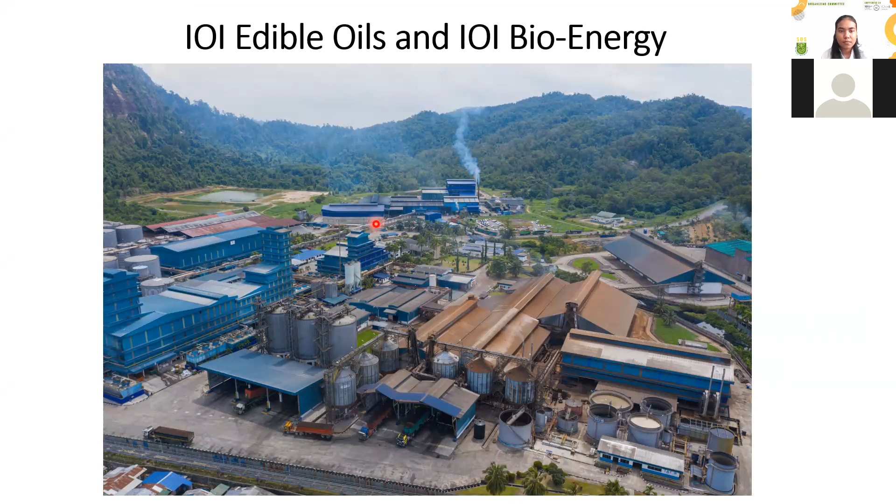Okay, this is an aerial view of the complex. This is the biomass plant, like I pointed out. This is the kernel crushing plant. And you'll again see here, this is the main office, and everywhere we can, we try and keep the greeneries.

If you zoom in, you'll find that along this pipeline as well, you'll see all the greeneries that are planted around it. So we try and maintain all the greens that we can in the complex.

We're also one of the largest tank farm operators in Sabah, with about 64 tanks. We also have a jetty connected to it. The pump house here, these two pump houses pump products straight onto vessels.

So this is what we call the lauric tank farm, because we process palm kernel oil. And the bulk of it is actually palmitic storage tanks, which store the derivatives from crude palm oil processed in our plant. This row here is the refinery complex: refinery 1, refinery 2, and refinery 3.

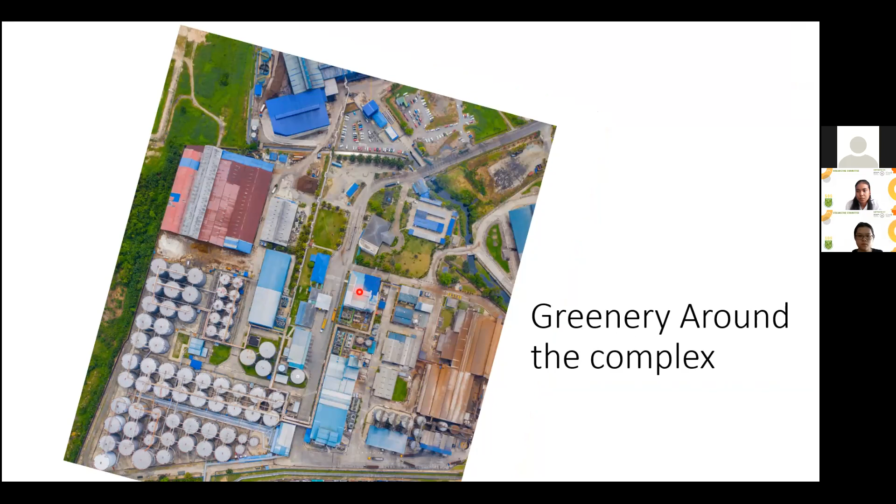And like I said earlier, nestled with it are also the dry fractionation plants.

Okay, I will talk about... let me hide this. Right there. Okay.

Some of the things we've done here - we've got, like I showed you just now, a long pipeline that supplies steam over to the complex, and there are many areas where steam is utilized. We also install a lot of steam traps and collect the condensate, which is used for lower grade heating applications.

We also have an award-winning vent economizer project that we did. We've also done quite a few inverter and LED light projects, converting most of the spotlights in the complex to LED lights, and also using inverters for selected applications.

We are the prime mover for converting the whole of Sabah to use liquefied natural gas versus diesel. The refineries here have now converted to using liquefied natural gas, which is actually more environment friendly than diesel.

I'll also show you a major heat recovery project that we did in the refinery. Our kernel crushing plants - we've also installed dust plants here to trap the fugitive dust and vapors that come out from kernel crushing. I'll show you some pictures of the results after we've done it.

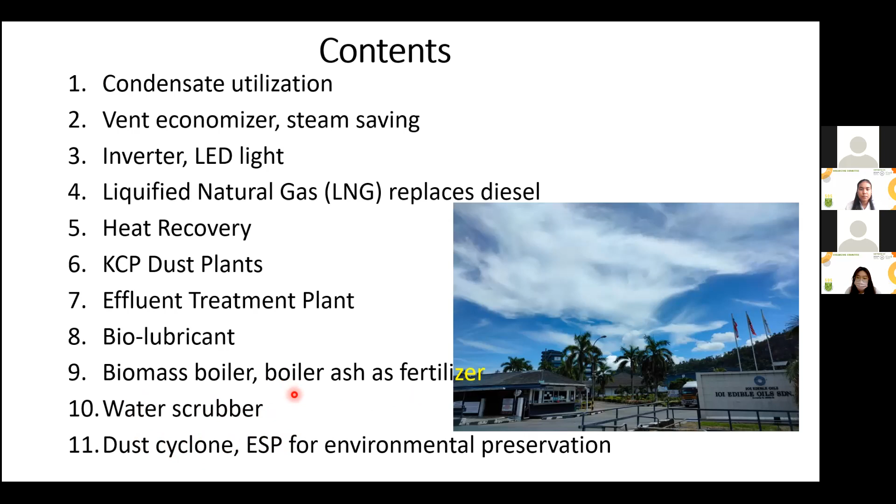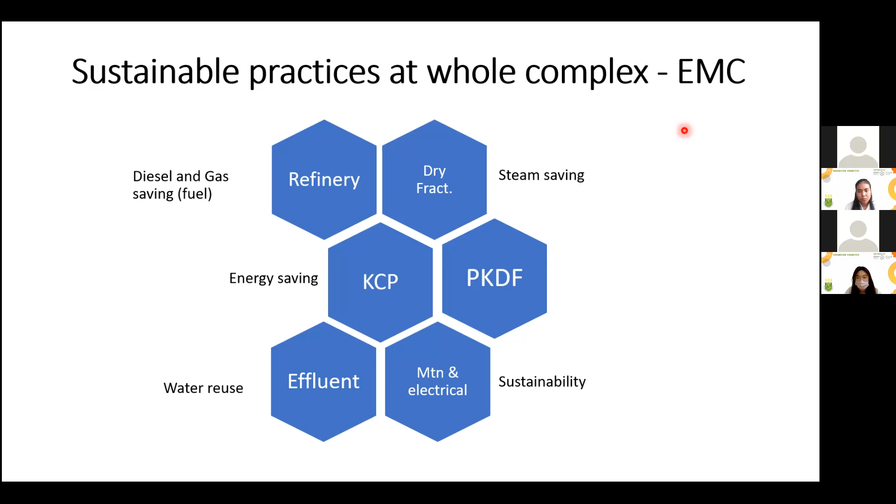Some of the practices, like I said, we have got refinery, dry fractionation, kernel crushing plant, palm kernel dry fractionation, effluent, and we also have maintenance electrical people here. So some of the things that we've done here to save energy and reduce greenhouse gas emissions from the whole complex: we have an energy management committee, which meets every 2 months. We've also got a registered energy manager who has to submit reports to Suruhanjaya Tenaga, the Energy Commission, every 6 months, reporting on what savings have been done and what has not. This has also helped us reduce our carbon footprint.

Like I said, we have a lot of supply of steam into our plant, and we have installed condensate recovery tanks in strategic locations. So the condensate from the steam traps is channeled to these tanks, and then used for lower grade applications to heat up, like for instance the palm kernel stearin tanks or even the stearin tanks. It has helped us reduce our steam consumption quite significantly.

In the palm kernel dry fractionation plant, it used to be 110 kg of steam consumed per ton of product, and they managed to reduce it to about 65 kg per ton, which is a 40% reduction in steam consumption. Another thing is, because we're not so dependent on steam and are using condensate, we're able to run the plant even if there's a slight steam interruption, since the condensate will keep the plant running for a longer period of time. This is one of the things that we have done.

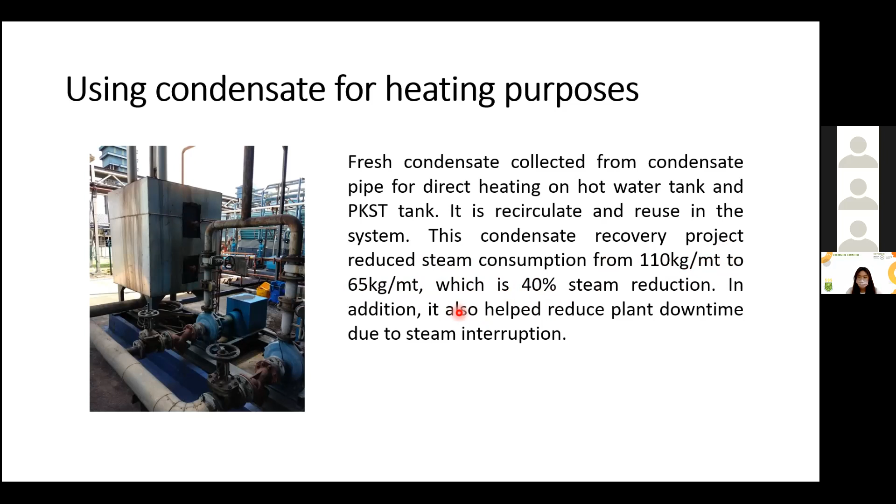Continuing on this, areas where we've recovered condensate and used it are also for CPO washing. We're one of the first plants in Sabah, and probably in Malaysia, to have installed CPO washing to reduce contaminants in processed palm oil. It requires the use of hot water, so rather than use steam to heat up the water, we actually recover the condensate and use it for the CPO washing process.

Other areas we use it for are stearin cake heating. The palm kernel stearin cake is typically discharged at about 25 degrees - it's a solid, a very hard solid. So it is then heated using heating coils inside the tank, and with our new system, we use condensate. Of course, whenever we start up the plant and there's no condensate available, we may use steam to heat up the water initially. This is for the palm kernel dry fractionation plant.

A similar thing was done for the dry fractionation plant as well, where originally they were heated using steam coils and steam fins - we've converted to using condensate. In some cases, we've had to also add a heat exchanger in order to ensure proper heat exchange and heat recovery to ensure sufficient melting of the stearin.

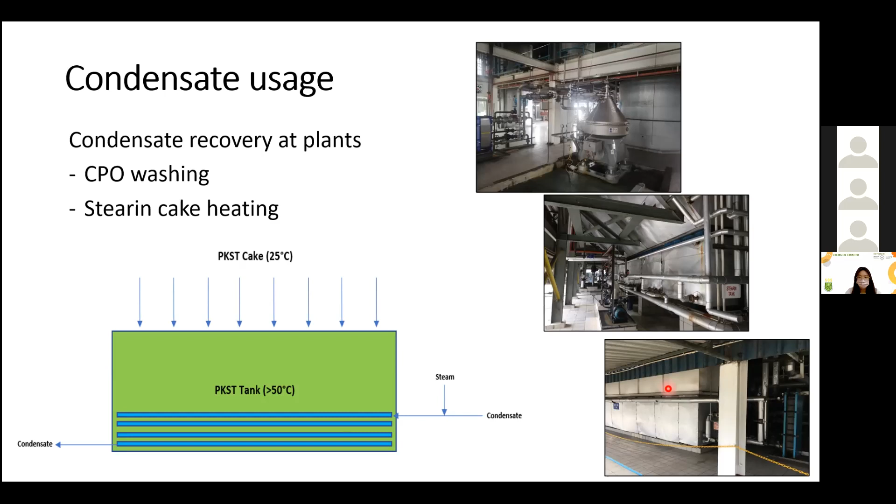Now, an added bonus from doing this is that the quality of our products has improved, because when you use steam, the temperature is actually higher than 100 degrees. And as you know, the higher the temperature, the greater the rate of reaction and the greater the rate of decomposition, so there's more deterioration in product quality. By using a lower temperature with condensate, coming in anywhere between 70 to 90 degrees, it has helped preserve the quality of these products better.

Now, like I mentioned, you've got these condensate tanks. As we were walking around the plant, one of our smart engineers saw vapor coming out from the condensate tank and said, why don't we try and recover this heat that's available in the vapor? So that's what we did. This vent economizer is this unit over here.

It's basically a compact heat exchanger into which water is fed. That water is heated up and goes to be used in low temperature heating applications. All this vapor is then condensed and dropped back into the condensate tank, used for heating purposes as well. This was implemented in the dry fractionation plant, and you can see the steam consumption started dropping from 25.5 kg per ton of palm oil.

It started dropping over the years as we implemented more vent economizers around the complex, and it dropped to about 20.5 kilograms per ton of product. The latest result is also around 20.4 kg per ton of product.

One of our engineers who sits on the energy management committee, but works in the palm kernel fractionation plant, saw this being done in the dry fractionation plant and decided to copy it. It was initially consuming over 110 kg per ton of product in the palm kernel fractionation plant. By implementing this, we were able to bring it down to about 67 kg per ton.

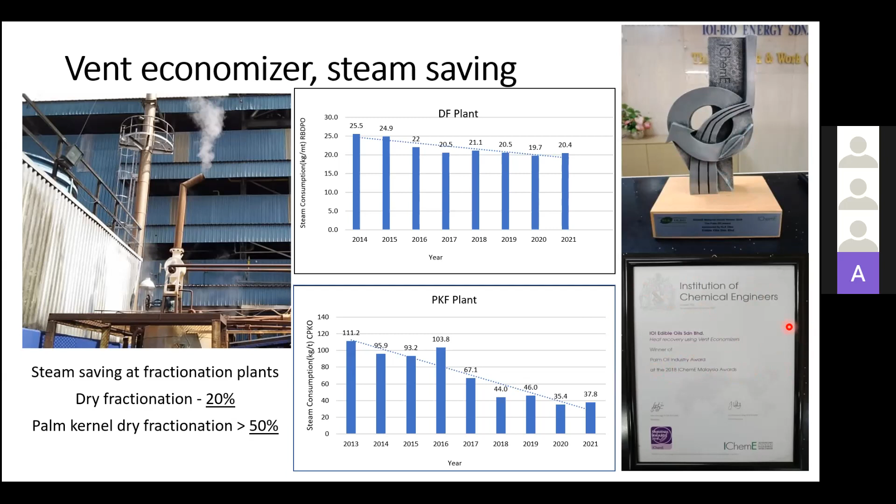Another thing we've done all over the plant is install inverters wherever required, in order to optimize operation, where previously pumps were being throttled.

It's quite sizable. Another thing we've done is install inverters for variable speed drives on our air compressors. If you look at a lot of air compressors, you'll see they actually run and stop when they achieve a certain pressure.

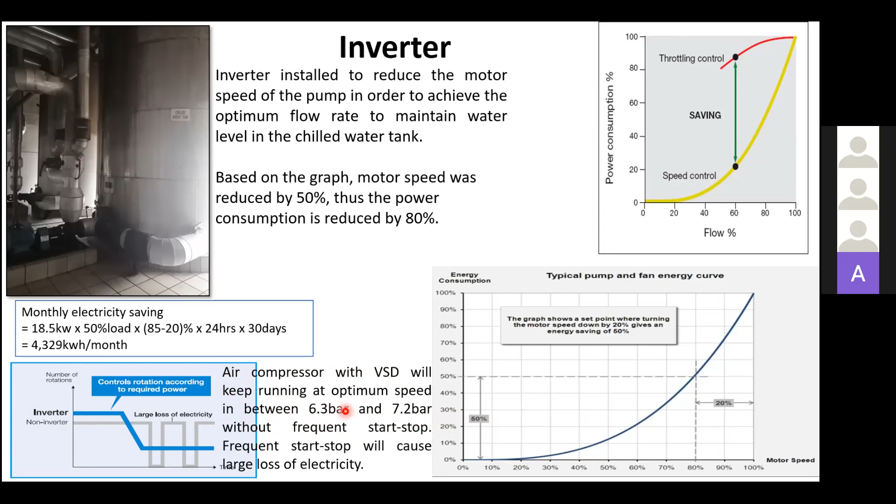So we grouped up all the savings we've achieved in the plant, looking at heat exchangers, inverters, and LED lighting. Starting from 2017, you'll see the amount we've saved in terms of energy has kept increasing. Now we are saving about 2.3 million kilowatt hours, and in terms of cost saved, it's about $163,000, roughly 500,000 ringgit in savings.

The inverters are installed on these pumps, the cooling tower pumps, with a cooling tower in the background. The inverters are installed on selected pumps. This is what the inverter looks like in the startup panel, or control panel, for the pump. And these are the cooling tower fans above the cooling tower.

Again, we install inverters so that when the temperature of the water is very low, we can reduce the speed or even stop a particular fan.

This is the LED lighting we've started using in the tank farm. Previously we were using spotlights, but we've converted to LED lights, which have a lower carbon footprint, consume less energy, and waste less energy.

So these are some of the areas where we've managed to implement our plan, reducing our carbon footprint by reducing energy consumption, as well as resulting in financial savings for the company.

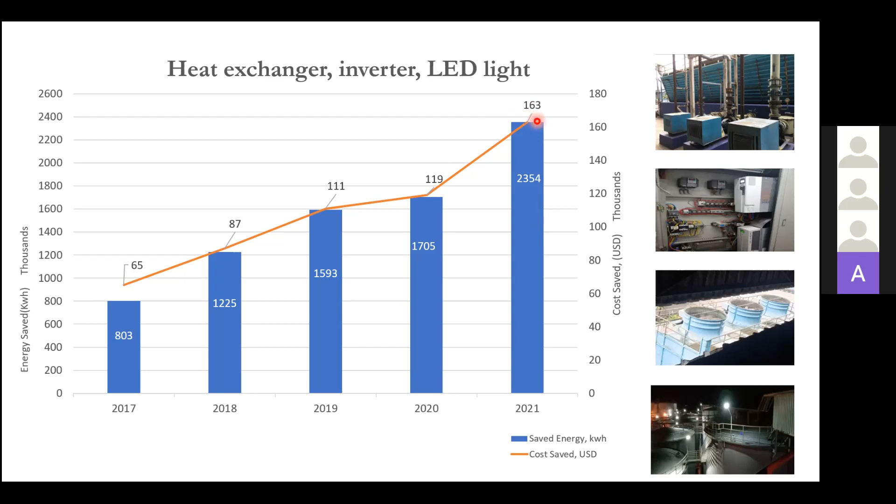Like I said earlier, we started talks with Sabah Energy Company in order to put up tanks in our various refineries to receive liquefied natural gas.

I'm proud to say that over the last few years, most of the refineries in Sabah have converted to using LNG, until SEC is already sold out on its gas. Now they've got to look at putting up a second train.

The reason we've done it is because LNG has got a lower emission factor compared to diesel, which is rated at 0.088 kg carbon dioxide equivalent per megajoule compared to 0.07 kg carbon dioxide equivalent per megajoule.

We have also tried to reuse foundations and avoided a lot of civil work, so no piling was done for this particular project.

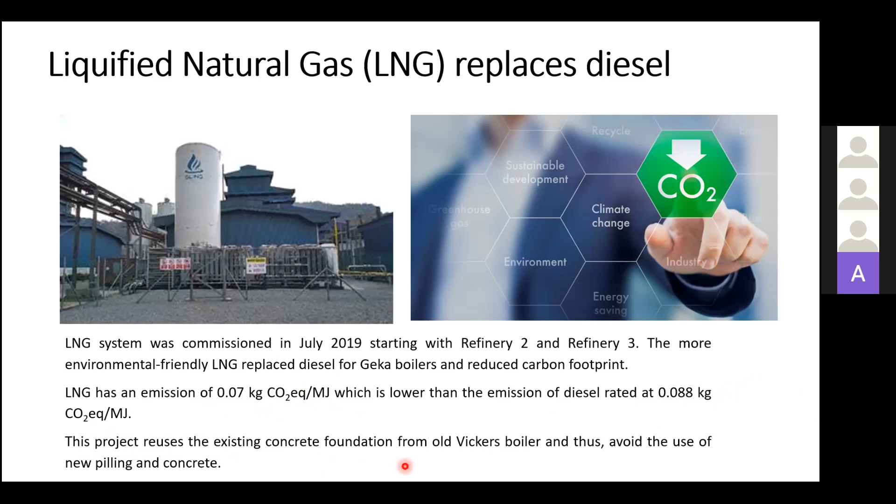Okay, this is an interesting heat recovery project that we did for one of the refineries. Let me show you the next diagram. Okay, this is the initial configuration of the plant.

BPO is bleached palm oil. It flows into a falling film heat exchanger, which then goes into a final heater, again a heat exchanger, which then goes to the pre-stripper, to the deodorizer. The very hot oil comes back and heat is recovered in this falling film heat exchanger, and then it goes for final cooling, and you have your RBD palm oil, refined bleached deodorized palm oil.

Over the years, this unit started to get fouled, and when we shut down, we didn't have enough time to do caustic cleaning, so we were losing out on the heat exchange and our consumptions were increasing. We do clean it, but it was not able to clean it sufficiently.

So the manager in charge of the plant suggested putting in spiral heat exchangers, so we invested in spiral heat exchangers. The bleached palm oil then goes to the spiral heat exchanger, then follows the same route to the final heater, pre-stripper, deodorizer, back to the spiral heat exchanger, and you get your product RBD palm oil as well.

Now, when we did this, we did not remove the falling film heat exchanger. We left it there, but we blanked it off. We isolated it from the spiral heat exchanger so we could run the spiral heat exchanger and avoid going through the falling film heat exchanger.

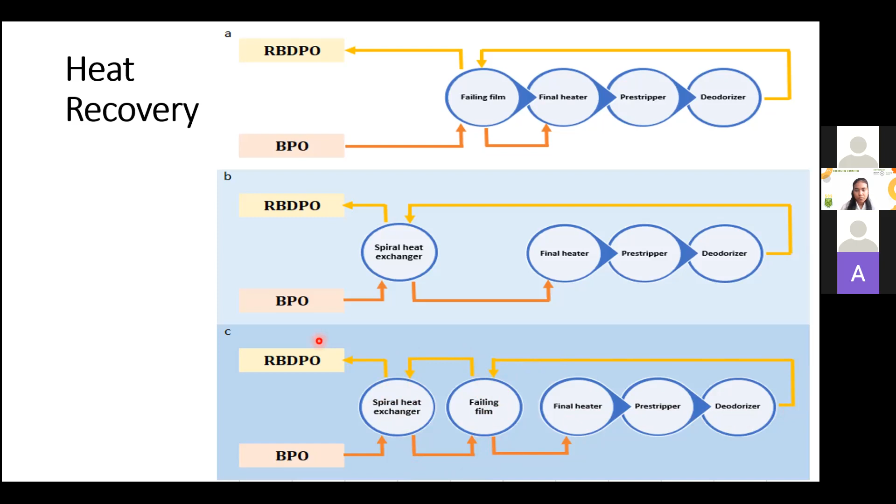That means the bleached palm oil goes to the spiral heat exchanger, then comes up, goes to the falling film heat exchanger, then next to the final heater, and then follows to the pre-stripper, deodorizer, and back to the falling film to recover as much heat as possible before it goes to the spiral heat exchanger and into our product storage tanks after being cooled. If I go back to the previous slide, you will see in 2014 the diesel and gas consumption was 5.73 liters per metric ton of palm oil.

In 2015, when we did the cleaning, we were able to reduce it by about 10%. This was with the falling film only. Then in 2016, after we installed the spiral heat exchanger, there was a 31% reduction in fuel consumption. You'll see it dropped from 5.73 to 3.93. We've used 5.73 as our base year figure, baseline.

Then it started going up. We did cleaning again of the spiral heat exchanger, and we were able to maintain about 36% over the few years. It stabilized around here. Then the engineer put back the falling film in series with the spiral heat exchangers, and you'll see that it has dropped significantly to 50%. So where we were initially consuming 5.73 liters, we now dropped to 2.89 liters.

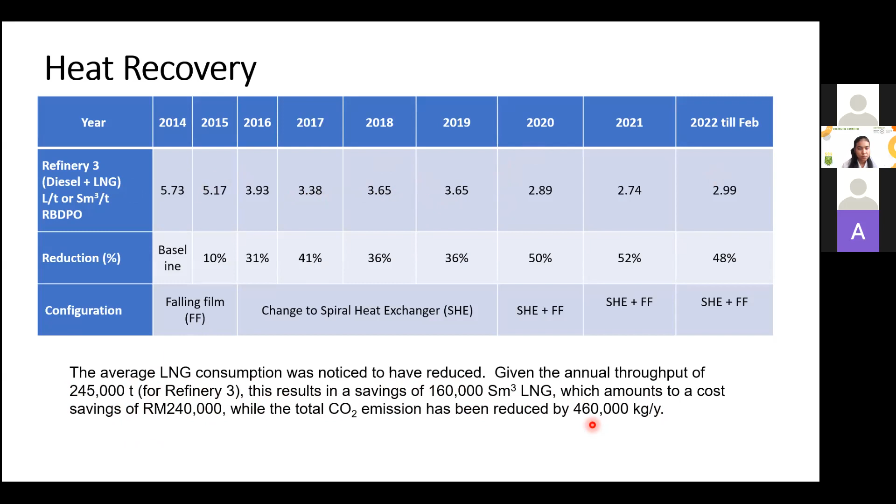So you can see during this period, we also switched from diesel to liquefied natural gas, and that's why the figures are shown here as an adjusted combined figure of using diesel and LNG. You'll notice that the LNG consumption has reduced, and the annual throughput of the refinery will give us savings of about 160,000 standard cubic meters of liquefied natural gas, which amounts to cost savings of 240,000 and a reduction in CO2 emission of about 460,000 kgs, or 460 tons a year - quite a substantial reduction just by doing this heat exchange reconfiguration.

Okay, let me leave you with another video now, which is by the World Wildlife Fund, and there is no voiceover on this. There are words, so you'll have to read it. So pay attention to the video - it's about global warming and the effects.

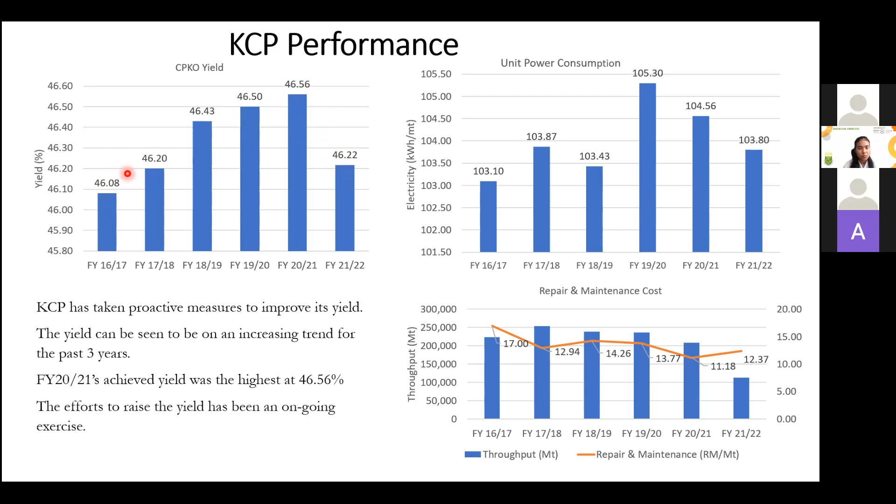Let me show you some of what we have done. In our kernel crushing plant, we have steadily increased the yields. This is the yield of the kernel crushing plant, and you'll see it has dropped this year. I know it's not the full year yet, but it's unlikely to recover to this level. It's mainly due to the poor crop coming in this year, affected by COVID and lack of manpower in the mills and estates. But what's interesting is we've actually kept it above 46% - this is a challenge for many kernel crushing plants, yet we kept it above 46% over these years.

At the same time, if you look at it over here, the power consumption actually reduced. These are supposed to work the other way - if the yield is improved, that involves greater pressing, which should result in higher power consumption. If you ask me why my power consumption jumped here, it's because we installed dust mitigation plants in the kernel crushing plant, so there was an increase in equipment installed there to trap the vapors and dust. But despite installing that, over subsequent years we've actually pushed to reduce our electricity consumption, or unit consumption.

Another impressive thing here is that, again, with increasing yields meaning more pressing being done, you'd expect more wear and tear. But we've actually been quite innovative in keeping our maintenance costs down - this maintenance is due to wear and tear of the presses. So the team here works very hard and tries to implement innovative ideas to keep the plant running at high yields, lower unit power consumption, as well as maintaining low maintenance costs.

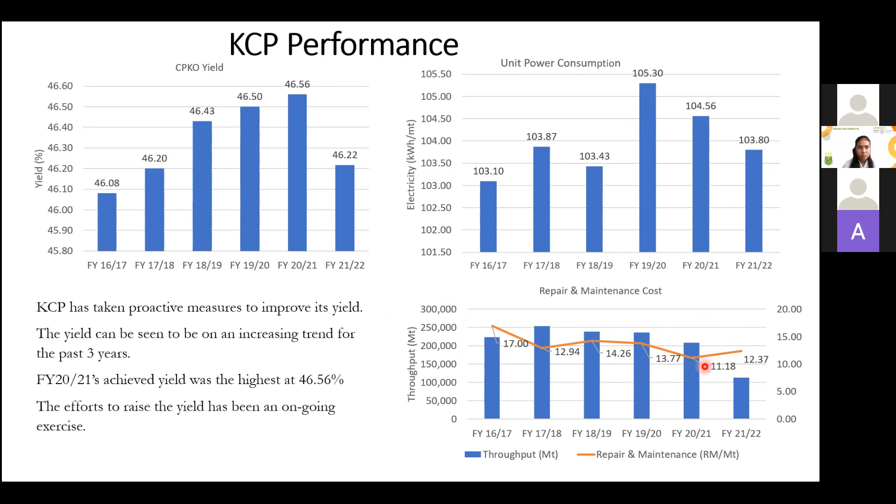From the palm oil industry per se, in this refinery complex, there's no real waste being generated. It's quite circular - everything can be used and sold.

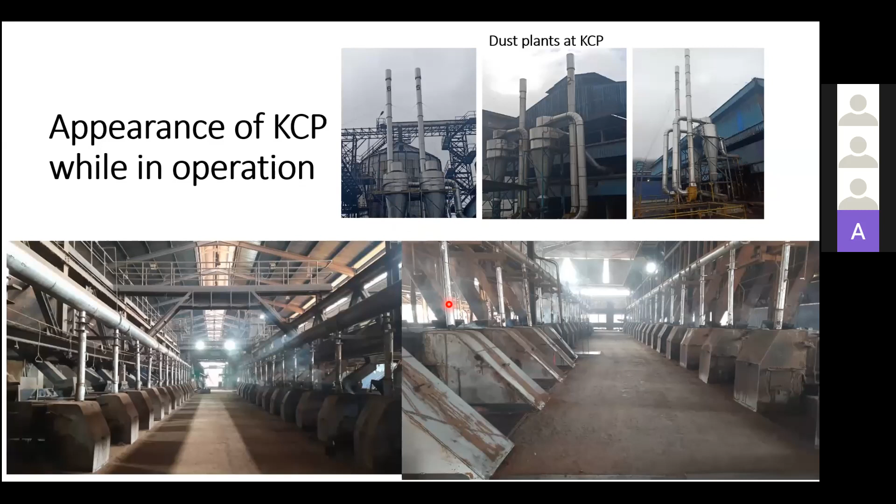Now, I mentioned that there is no waste from the palm oil industry. This bleaching earth is used to remove the impurities in palm oil during the bleaching operation. When it is discharged from the process, there is about 20% oil stuck to the bleaching earth.

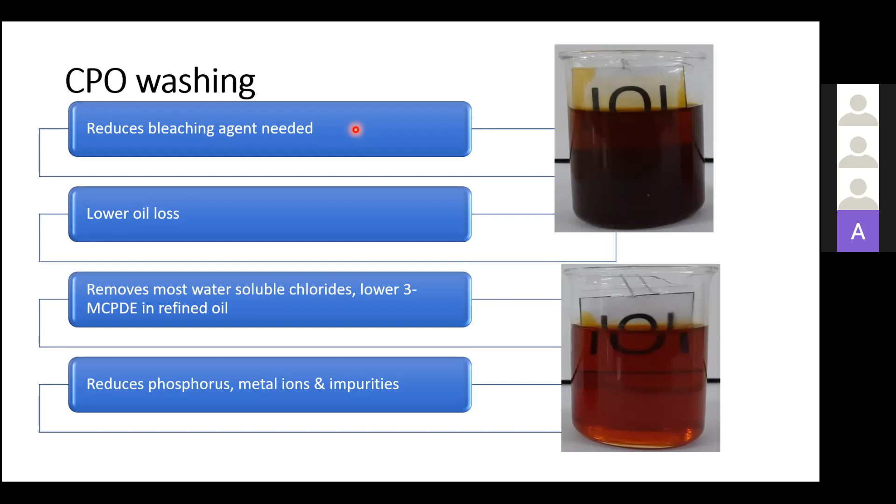Now, when we did the CPO washing as well, the water stream had very high oil content, and this increased the load or burden on the effluent treatment plant. In order to reduce that, we had a purpose-designed settling tank fabricated, and we're able to reduce the oil content significantly to below 1,000 ppm, so that it could be easily processed by the effluent treatment plant.

If it were very high COD, it creates a very great strain for the reactors or the bacteria in our effluent plant. Yes, we use bacteria for the sequential batch reactors in our effluent treatment plant.

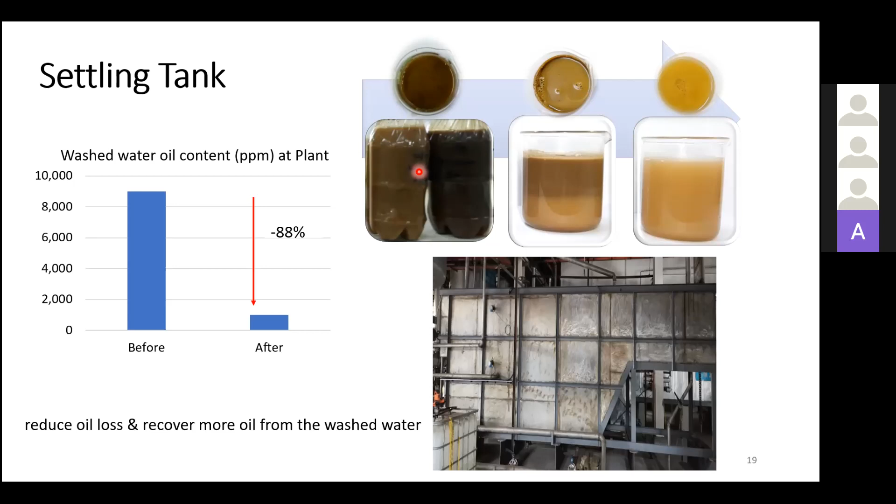I'll explain that later. We do a lot of water recycling in our plant. We have our own treated water, and for some applications, it goes through reverse osmosis after the basic water treatment. If you're familiar with the reverse osmosis process, maybe about 15 to 20% of the water treated becomes rejected water. We try to use that rejected water so we minimize water being wasted.

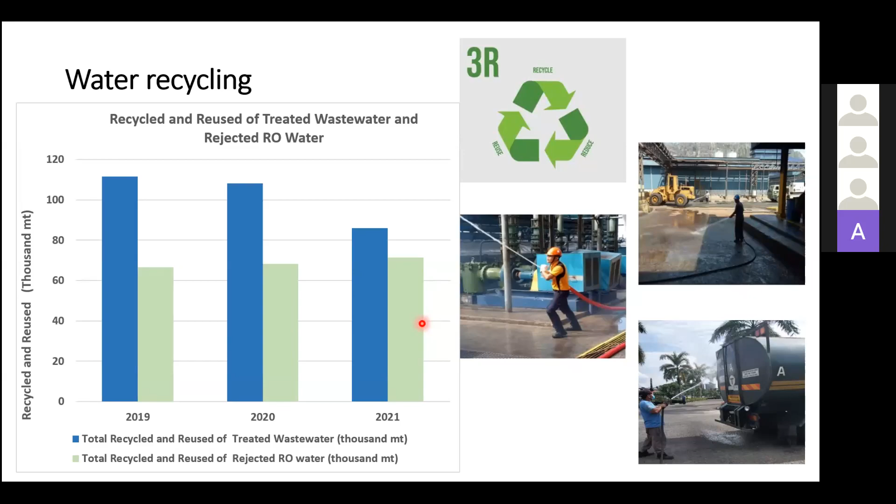We did some optimization, and we were able to reduce this aeration time significantly, and as a result, reduce the electricity consumption in the effluent treatment plant. We've also managed to shorten the process, bypassing some of these steps, and reduce chemical usage in the process as well, again reducing our carbon footprint.

Previously, the sludge that was generated was actually disposed of, but now, since all of the waste coming from the refinery is actually organic, we send that sludge back for digestion in the reactors, and it is possible for the bacteria to totally digest and reduce the COD of our water.

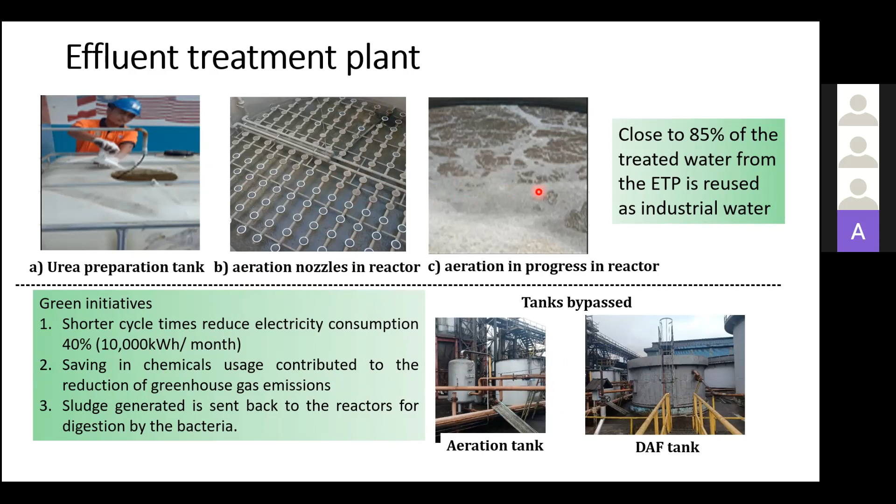But the problem is the stability and deterioration of olein or palm oil derivative due to oxidation and high temperature application.

So we're actually doing some experiments to try and enhance the life, and I'm proud to say we've been running this for more than 6 months now, and it's showing positive results. We've also managed to work with a third party who has suitable additives and ingredients, all made from palm oil, to be added into the olein in order to be used as a lubricant.

One of the problems faced by edible oils is that there are trace amounts of mineral oils found in processed oils, which has become an issue of complaint by the West. So this would be a good initiative to convert the industry to use our own product, create demand for it, and ensure that no lubricant contaminates our edible oils. I'm sure you wouldn't want your family members or even small babies consuming mineral oils, so this is a good way to use our own product to address that challenge.

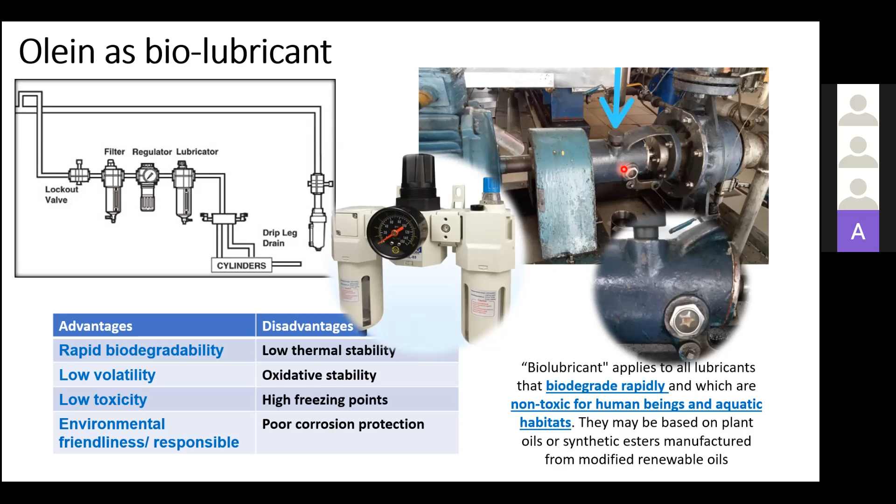We're putting some improvements here to try and improve this further. We've done a new boiler with an improved grate system, which has internal drying, so the fuel goes into a drying zone first before it is combusted. That helps to improve combustion.

By the way, I think I mentioned that this fuel typically comes with about 50% moisture, so it's a difficult fuel to handle, and we have to evaporate that in the boiler. So we're trying to become as efficient as possible. Now we're also trying to do some drying outside the boiler before it goes in, to improve this further and reduce our fuel consumption as well.

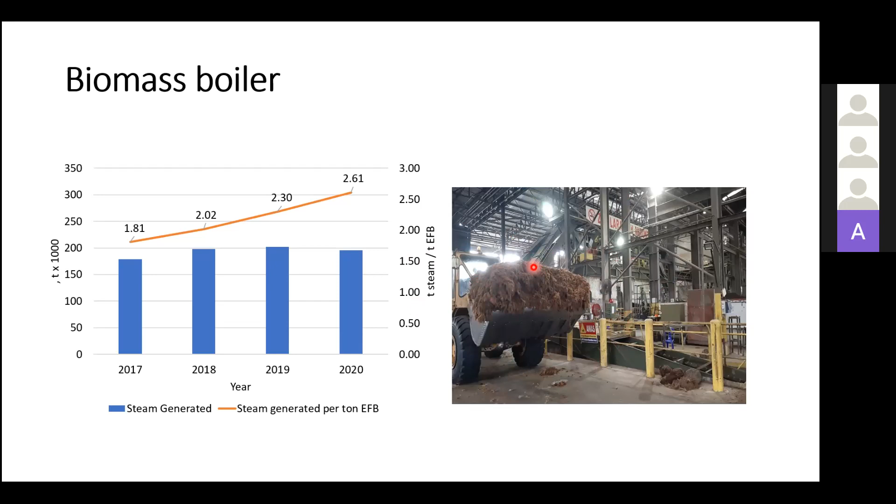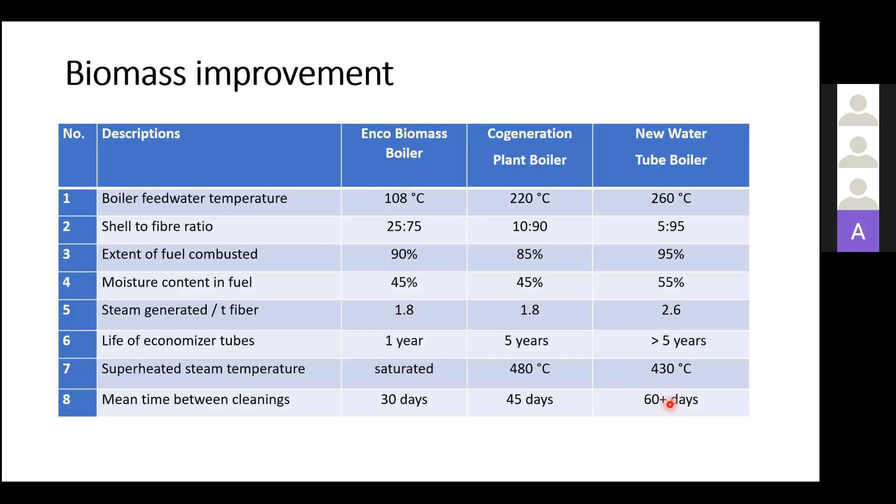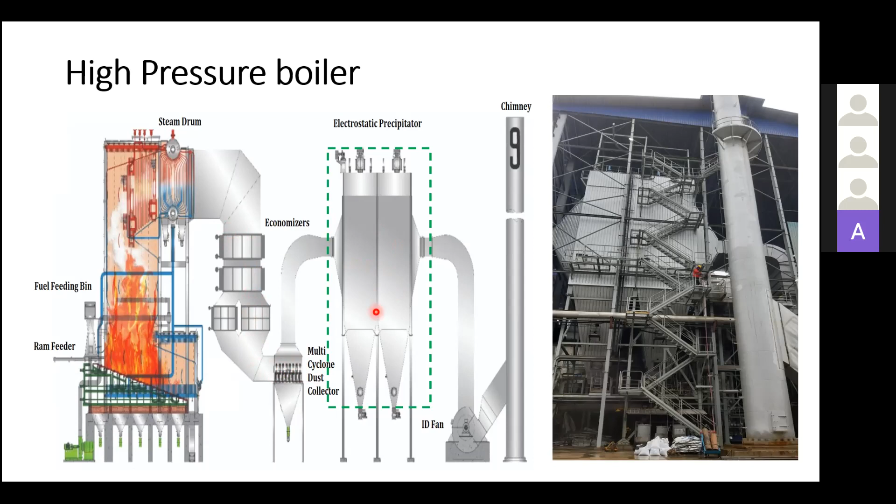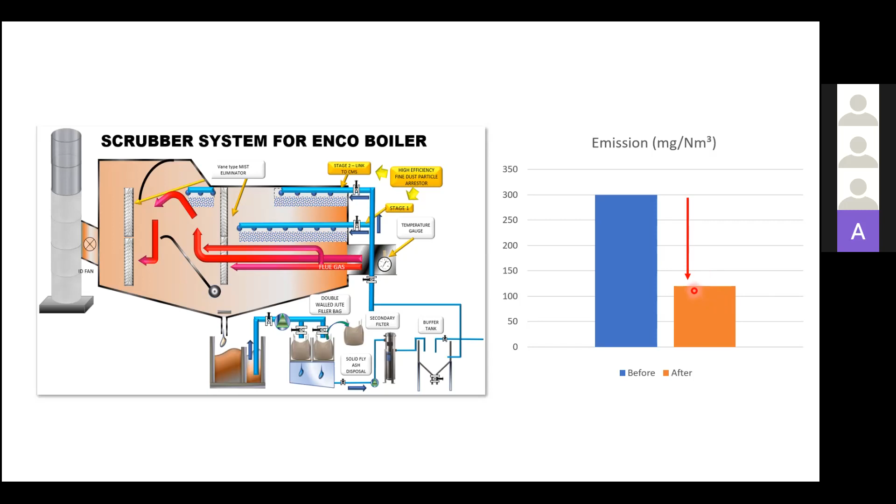Again, you'll see where we had emissions of 300 milligrams per normal meter cube, it has dropped to below 150, well within the permissible levels given by the Department of Environment for this type of boiler.

Now let me just give you a summary of our greenhouse gas emissions and what we've achieved in terms of reduction. We've used the year 15-16 as our base year, and you'll see where we had 35 or 36 kg of CO2 equivalent per metric ton of product. We've done projects over the years to try and reduce it, and it stands currently at 25.92 kg for the palm oil.

For the olein and stearin, let me explain. For those who are interested, my colleague, registered chemist, Ms. Yong Yen Lee, will be doing a presentation on the palm oil refining process, and also will show a video to walk you through the plant and show key processes tomorrow afternoon. So please do attend that if you would like more information about the refining process.

So the palm oil is fractionated into olein and stearin, these are the products that come out from fractionation. And here we have it also reduced by about 50%. From 23 kg, it has dropped to about 12 kg.

Crude palm kernel oil is from the kernel crushing plants, which is a very high energy usage plant. It's dropped from 129 kg to 92 kg. The co-product from the kernel crushing plant, the palm kernel expeller, has dropped from 59 to 42 kg, and so on. In all cases, we are working on reducing the carbon footprint.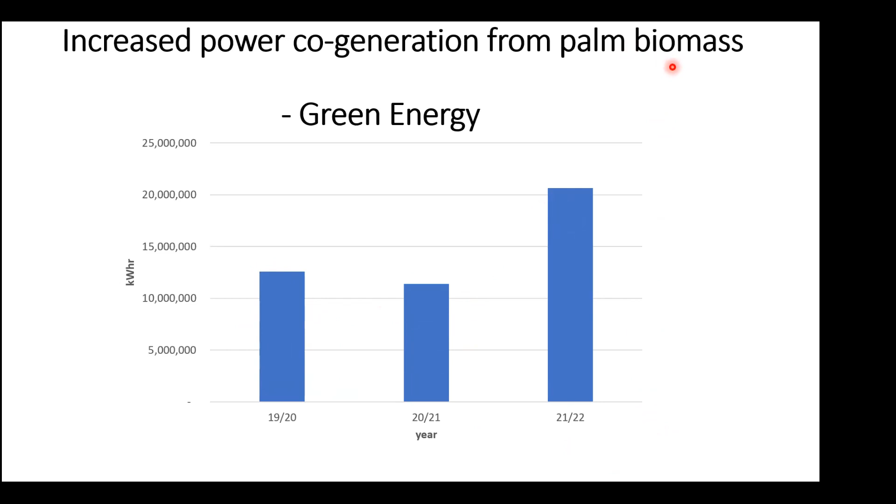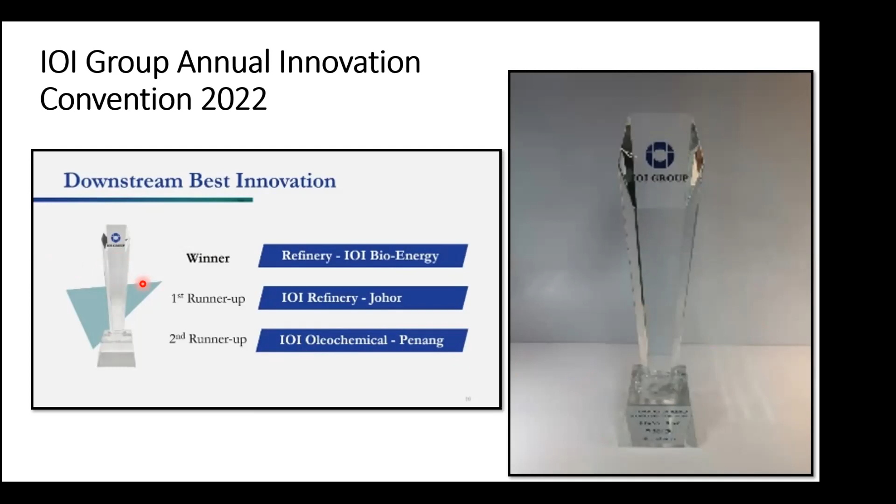In 2022, we won the group annual innovation convention for the IOI group. Again, the bioenergy plant was awarded the winner, beating the other refineries and even oleochemical plants in the group. This is the trophy that we won. And the actual winning project was something that cost less than 50,000 ringgit to do, but ended up in a huge greenhouse gas savings, as well as, if you convert to ringgit, about 6.1 million ringgit in savings, just from a project that cost less than 50,000 ringgit.

Now, before I end today's presentation, I want to leave you with another video.

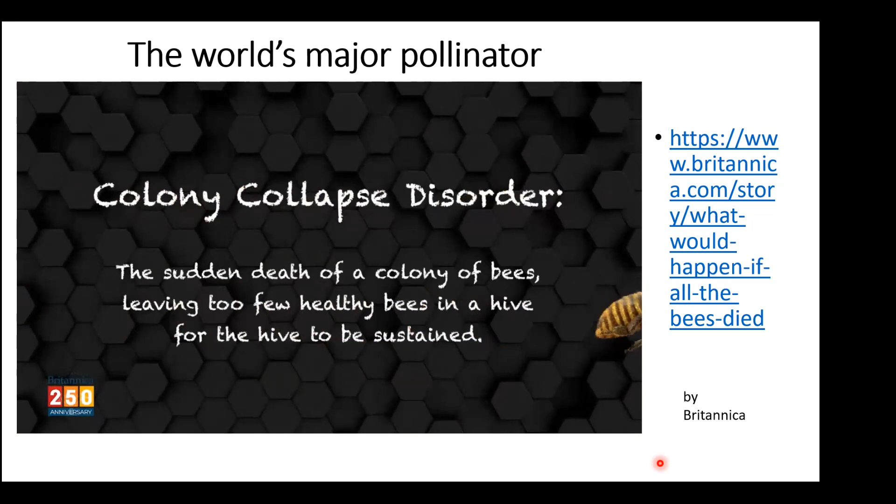Is there an animal humanity feels more conflicted about than the bee? They're kind of cute, right? And they can give us delicious things like honey and useful things like beeswax. But they've also got those infamous stingers. Bees can be a little scary, and in swarms, they can be deadly. So when reports hit the news about colony collapse disorder, some of us might have thought, well, what's the big deal? Are the apiphobes right? Are bees worth the risk? What would happen if all the bees died? Unfortunately, we'd lose a lot more than baklava and organic candles if bees went extinct.

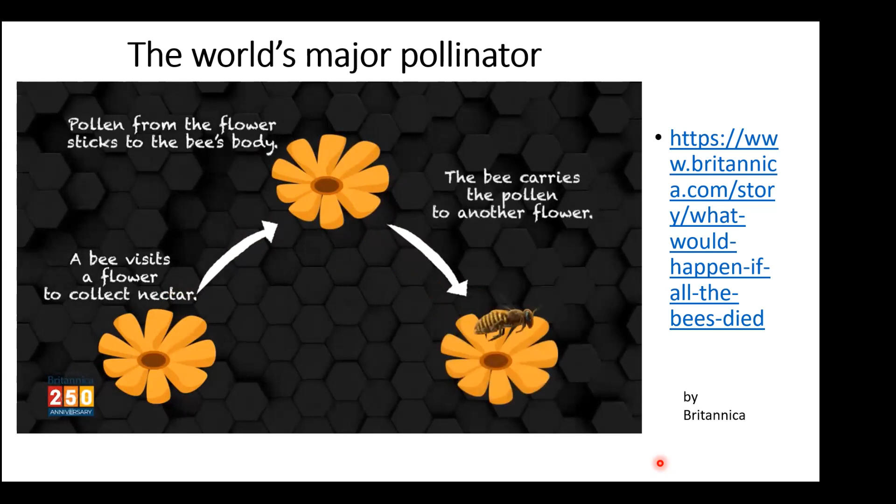There are more than 20,000 species of bee in the world. Together, they are probably the most important group of insect pollinators. If all the bees suddenly disappear, there would be a vacuum in our ecosystems that would be very hard to fill. Many bees have co-evolved with flowers so that they are a fundamental part of those flowers' life cycles. These plants would likely go extinct without the bees. Other plants that bees pollinate might survive with other pollinators, but they would be at a disadvantage. Blueberries and cherries rely on bees for up to 90% of their pollination. We could be looking at a dire situation in the pie industry.

There are also animals that rely on bees for food. If we lose the bees, some of our most beautiful natural species could be next. All these changes would have ripple effects throughout ecosystems and into human society. Humanity probably wouldn't starve without bees. Fortunately, many of our staple grains are pollinated by the wind. But nutritious fruits and vegetables could be lost or become so expensive that few people could afford them. And eating healthy is hard enough as it is. It's hard to know just how such a huge change to the natural world would end. By disrupting a key link in the food chain, we could be changing our entire way of life. It's lucky this is just a hypothetical, right?

Sustainability, global warming, and bees. What do they have in common? Well, humans, while changing the climate, have also made dramatic changes to Earth's landscape. The increasing human population and our demands for space to live and grow food has meant that more wildlife habitat has been changed into urban and intensive agricultural use. This results in loss of habitat and food sources for bees and insects, as well as exposure to potentially harmful pesticides.

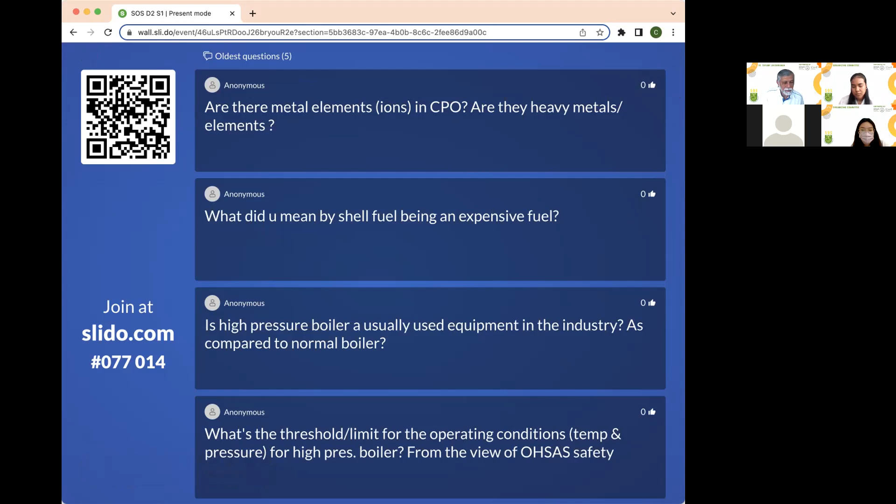Yes, are there metal elements? Yes, there are, because you must remember it is a very intensive mechanical process where pressing is done. Typically you'll find iron and maybe some copper, which are considered poisons to the oil. So whatever alloying elements you have in the iron or steel will end up coming into the CPO as well. You may find some chromium and nickel too, because those are alloying elements found in stainless steels.

Shell, palm kernel shell, EFB fiber, and mesocarp fiber are three of the wastes generated in palm oil mills. Shell is more compact and has a higher calorific value, so it's the preferred material. Being denser, it can be easily transported over longer distances, giving it more commercial value. An indication: Shell currently sells at about 300 ringgit a ton, whereas EFB fiber is something like 45 ringgit a ton. This can change from time to time depending on supply and demand. There are industries in Korea, Japan, and even Thailand that try to buy Shell, so there are parties here in Sabah who collect Shell and export it overseas. So you see there is value in Shell—it has more commercial value, ending up more expensive because of its denseness and calorific value.

High pressure boilers became the norm in refineries maybe about 20 odd years ago. Previously we used thermal oil heaters, but when there was a threat of contamination of food with thermal oil, it was banned, and all refineries subsequent to that were equipped with high pressure boilers. So the high pressure boiler is actually a closed loop boiler—there is no steam or vapor being sent out. It goes to the final heater I showed you in my process, then condenses and comes back again, just circulating within that loop. There is no discharge of steam or water. So it's a closed loop.